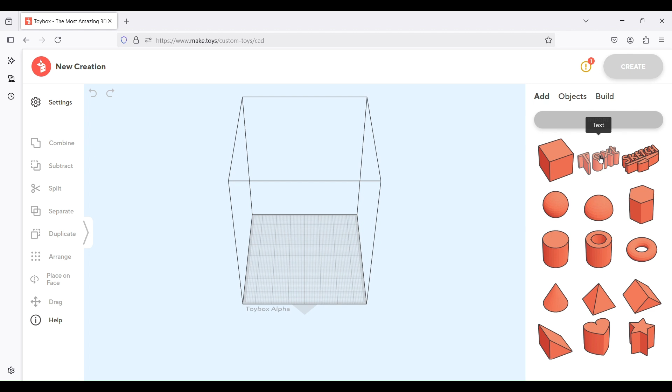So I can do a keychain a bunch of different ways. I could do a square background, I could do circle background, anything I like there. I'm just going to use the text here first, and I'm going to type in my name. I'm Robin, and I'm going to choose Sophia because I think that's a really pretty font. And I'm going to go ahead and just get rid of that.

Now, I do want to tell you, I am using a PC. I am a mouse user, a PC user. I've got a laptop here. If you're trying to do this on a tablet or something like that, then you'll have to figure out the motions on your own. I find that a mouse is really easy to design with.

I've been designing for several years now. I have used Tinkercad quite a bit, I love that. I also love the new creator space here.

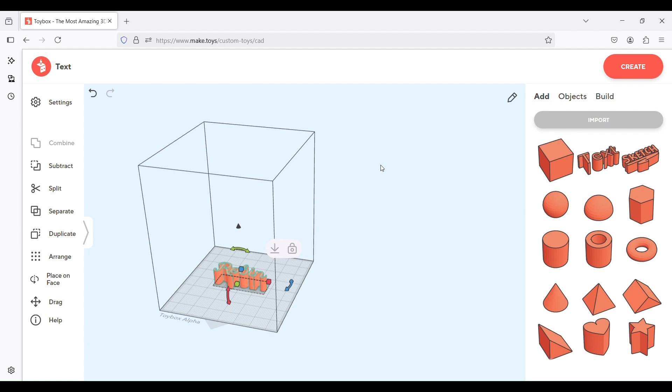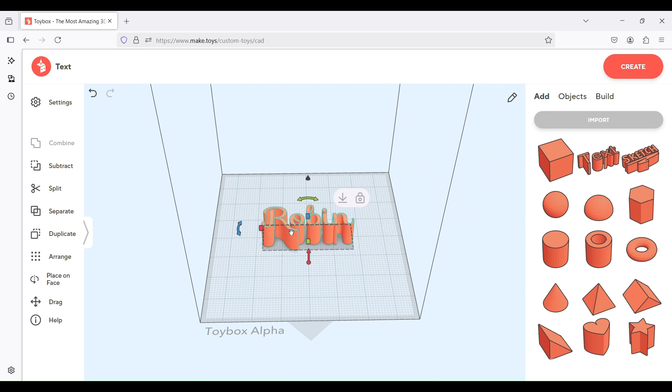So I'm using my left mouse to drag my view. The right mouse drags my view side to side, up and down. So this is my right mouse click, I'm just holding it down and dragging. Left is doing this. And the center, there's a scroll wheel in the center of my mouse, that is going to zoom in and out. So between the three of those things, left mouse, right mouse, scroll wheel, I can get a really good view of what's happening.

Okay, I am going to decide how big I want this. I chose a square. You know what? Let's try a square and see how that goes.

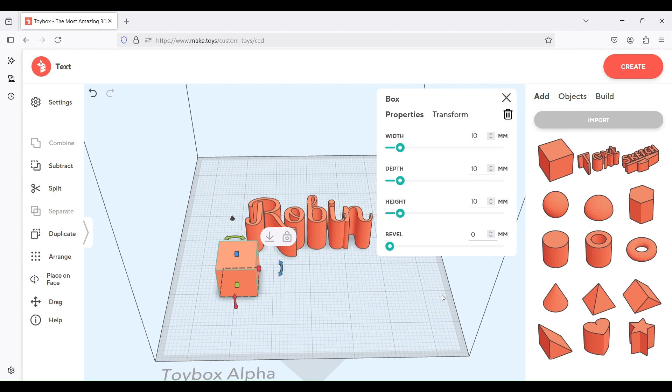Now, this workspace area for the Toybox Alpha, I never design anything more than 72 millimeters. So each one of these is a centimeter, which of course is 10 millimeters. So that's 1, 2, 3, 4, 5, 6. And then there's, you could count however many that is, but let me just tell you, 72 works really great for most toy boxes.

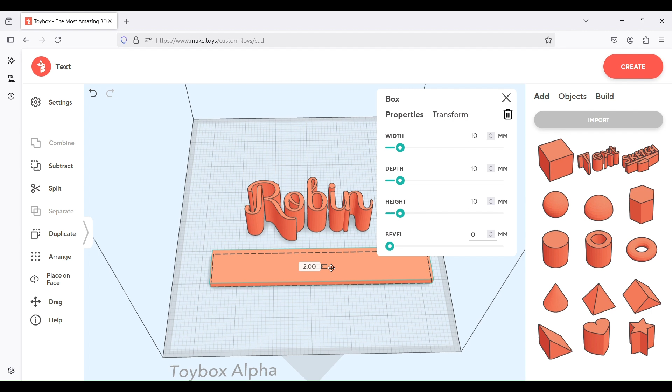So I'm just going to go ahead and bring this out a little ways, I don't know, 50, maybe 60, something like that. See how it shows me? These handles, the little handles on the side, go side to side. This one here is the height. I really only need about 2 millimeters in height on that. And this one is my depth. So, I don't know, 20 millimeters, nice round number. Let's just see how that fits.

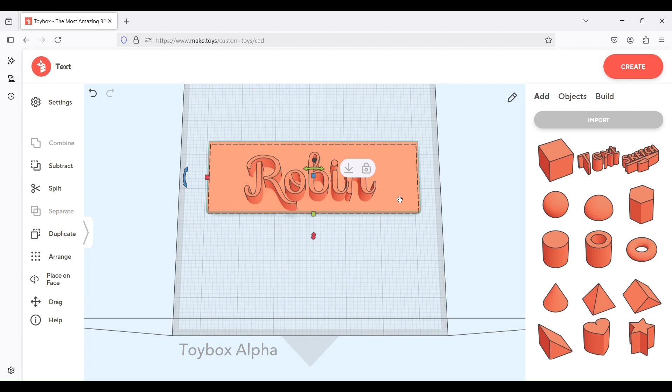If I need to get rid of this, the properties box here to get it out of my way, I could just X on it there. I'm going to go ahead and say that looks about right, maybe how I want it to be.

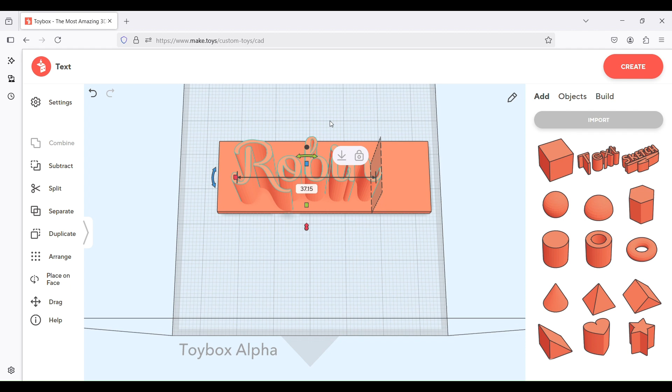So I really want my lettering to be bigger. So a couple ways I can do that. I can actually just do up and down, which is not really what I need at the moment. I could go one direction this way, also not really what I want to do. And by the way, if you're using a keyboard, you can do Control Z to undo anything you want to do. It's also right here, if you hover a little bit, you'll see undo. So anytime you make a mistake, just hit undo and it'll go back as many times as you hit undo.

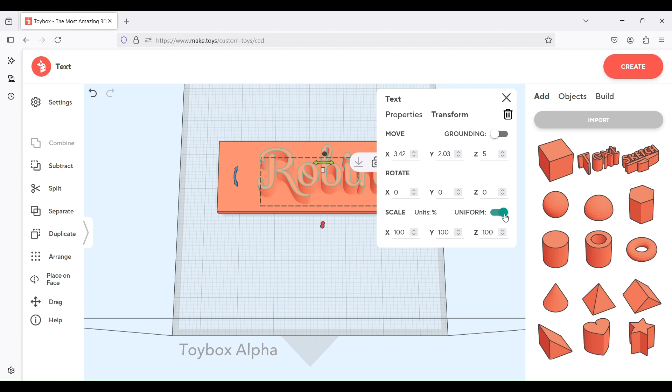I would like to actually, I'm going to edit this and I want to hit transform here. I'm going to do my uniform scale. So when I do that, see how whenever I bring that up and down, it makes it proportional, so it's uniform all over. Alright, so I'm going to do uniform scale and get it on there. That looks pretty good.

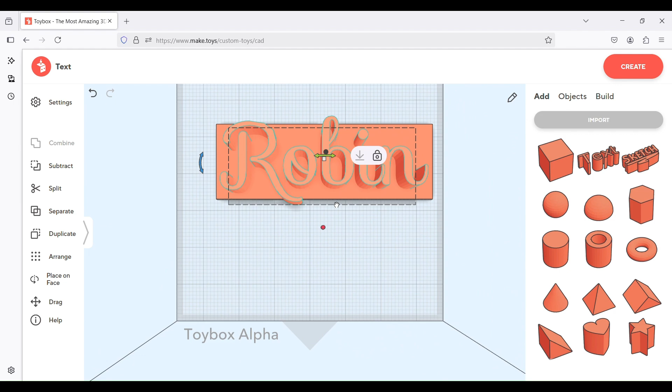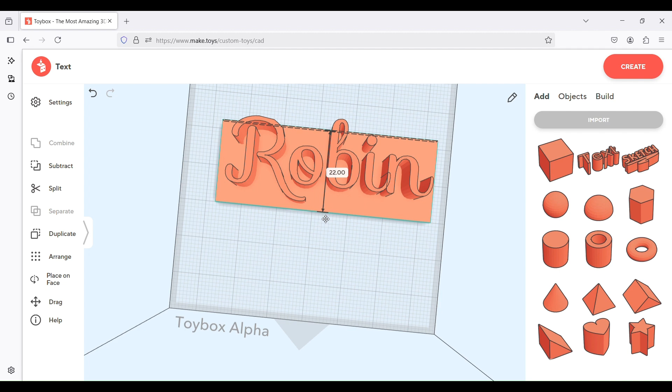I love it whenever the fonts are hanging off a little bit, but you got to be really careful. See how I'm going to have a little problem right here? That probably is going to manage to fall off at some point if I do that. So I can actually make this bigger, I can kind of do whatever I want. I would love it if I felt comfortable leaving it hanging out there, because I think that's really cool looking. I could make it kind of like this, but I just know from experience that would just chop off at some point, so I'm not going to do that.

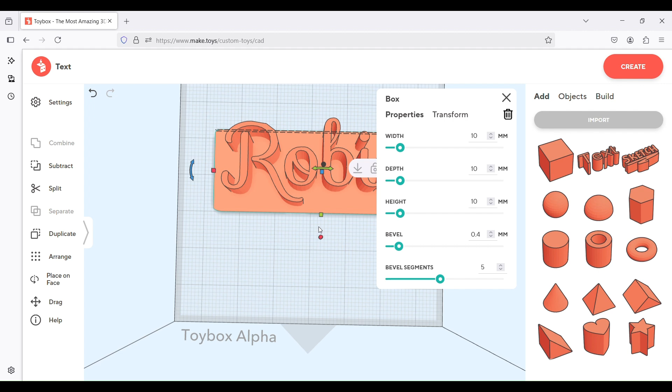I can bevel this, so back up here in my edit screen with my pencil, I can bevel. That means it's going to take the corners. See how the corners are beveling? I could go all the way into an oval if I want to, or I could just do a teeny tiny little bevel on those corners. The bevel segments is how smooth that bevel is. So the more segments you have, the smoother that bevel is going to look. So I could do that, I probably would do that.

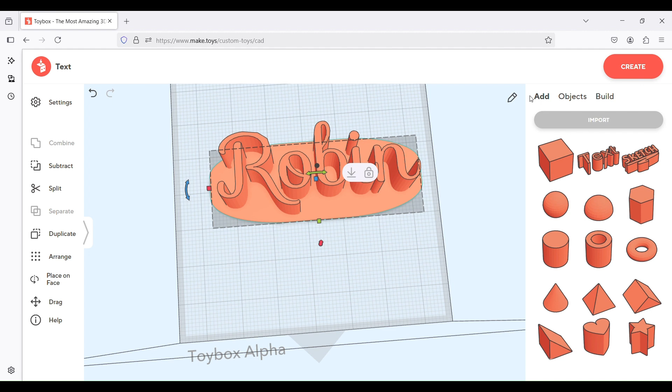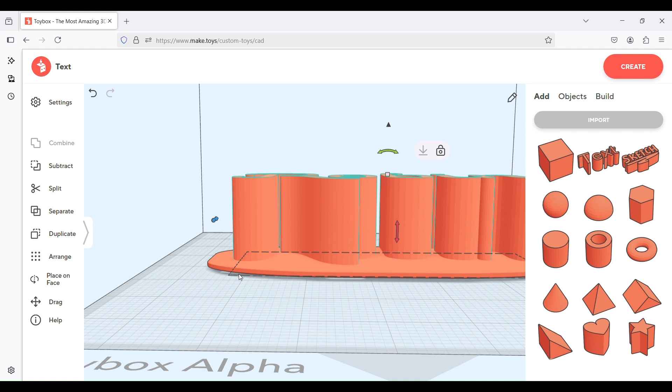Now I will tell you, when you start beveling, let's say I bevel this, and now I try to create this, it's going to tell me I need supports. So let me show you what that means. Underneath, if you look, let me zoom in so you can see better. See underneath how it's hanging up in the air? If you think about how your printer prints, it prints layers. It can't print stuff that's just hanging out in the air like that.

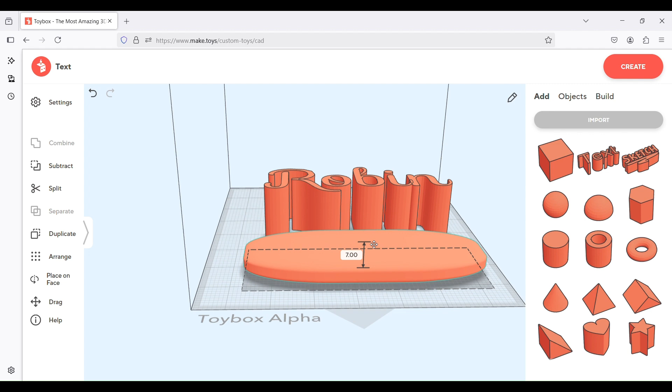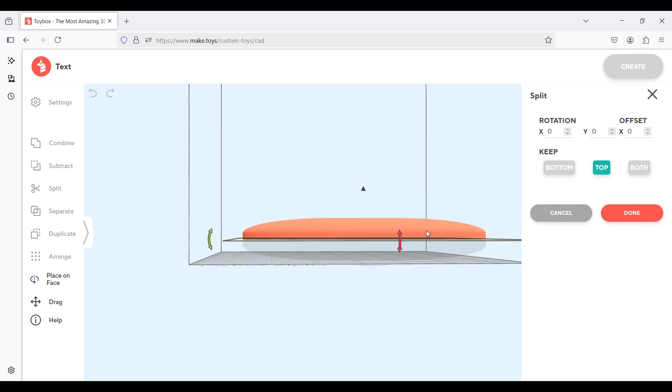It just can't. So there is a way we could, if we really want this shape and we really want it to print, there is a way we could do that. We could make it taller. And we still have some problem under here where certain angles would print fine and certain angles wouldn't, but we can split that. So over here on the left, there's a split, and I can keep the top, see right here, and hit done there. And now that is perfectly flat on the bottom.

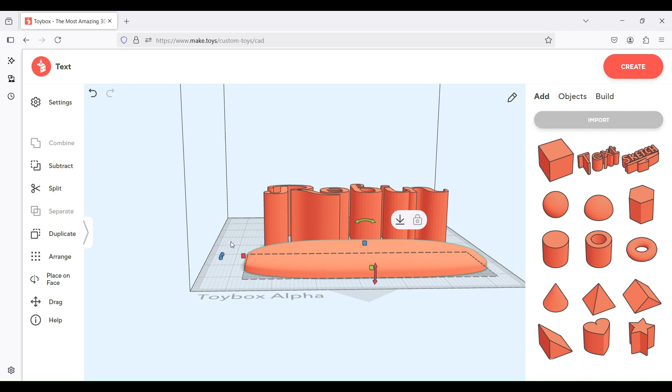Now it's not going to print up here in the air, so if I hit create, it's going to say you can't print that because it's just hanging up in the air. So that's what this button right here, snap to build plate, does - it takes it down to the build plate, which is your surface. So now it's perfectly flat, so that would print just fine. So if I told it to print, it's not going to give me my error messages anymore.

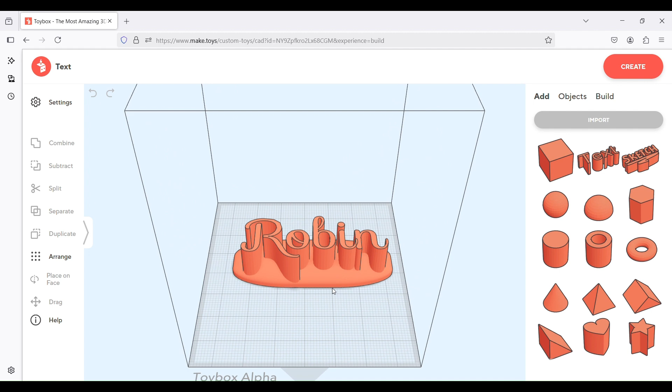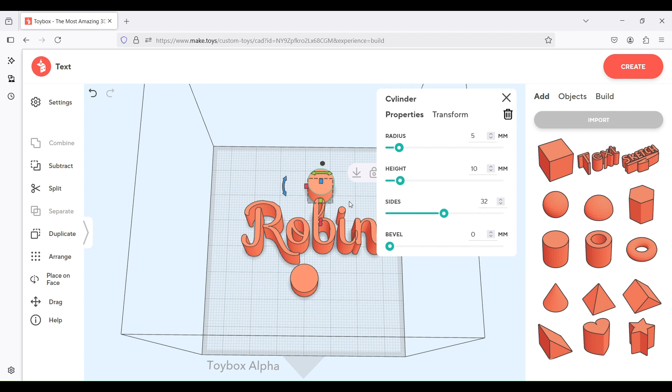Okay, I think that's fine, but I'm going to try also the cylinder here. So to delete a piece, I just hit delete on my keyboard. I don't know what you do on the... oh, that's interesting, when I dragged it brought two of them. That's cool. I don't know what you do with your tablet, so I apologize, I just don't design on a tablet, it's just not my thing.

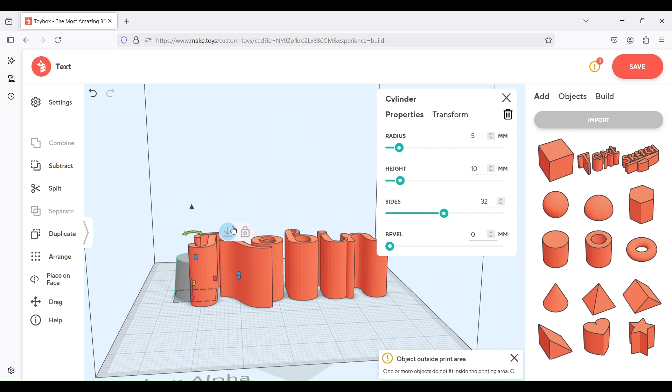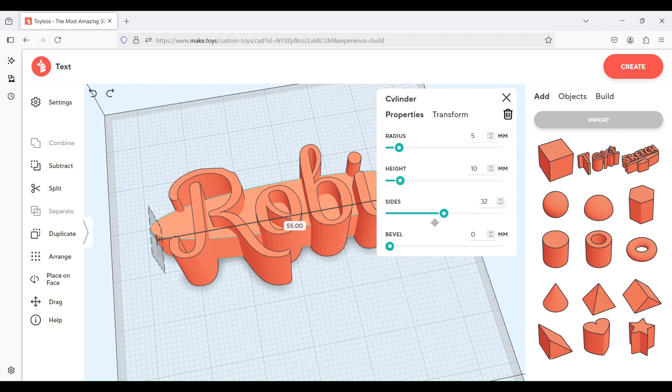All right, I'm going to create, let's see. Whoops, I want that to sit on my work surface. Oh, I accidentally turned it just a little, see how I turned it? I can undo either here or Control Z on my keyboard until it's back to normal. So I accidentally rotated it. I'm going to get rid of that so I can see.

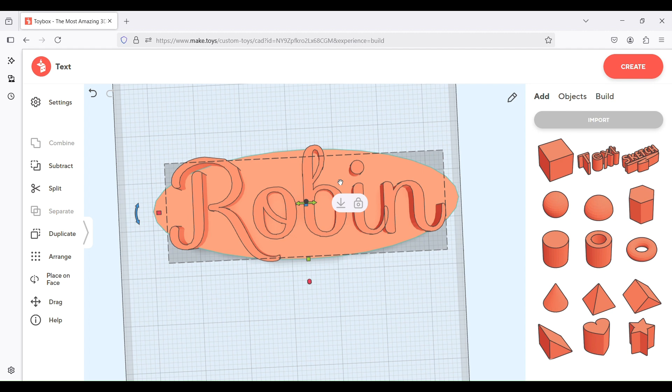I'm going to bring this on out, and I'm going to make it tall. I think this might look really fun. Let's see, I'm going to do this, and I'm going to create it. Oh yeah, I like that. Right here I've got a hole, I'm going to get rid of that hole, so let me move it up just a little.

And by the way, when you get to be more of a power user, there's a lot of, here in your edit, when you go into transform, you can do a lot of interesting things here with grounding and uniform scaling and all that stuff. So don't be afraid to play.

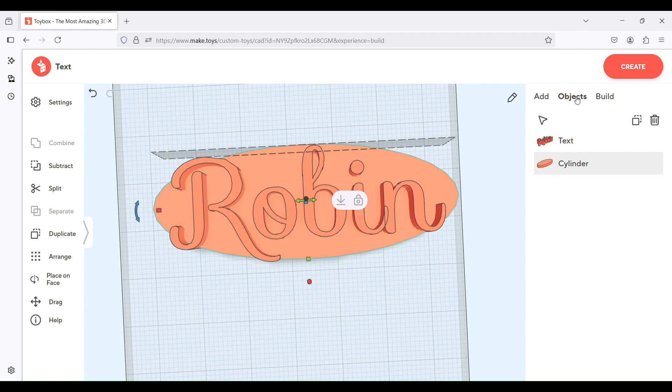You can go in here with your objects and all that, so don't be afraid to play with that. Okay, that looks pretty good, except it's really tall. So I think right about there looks good.

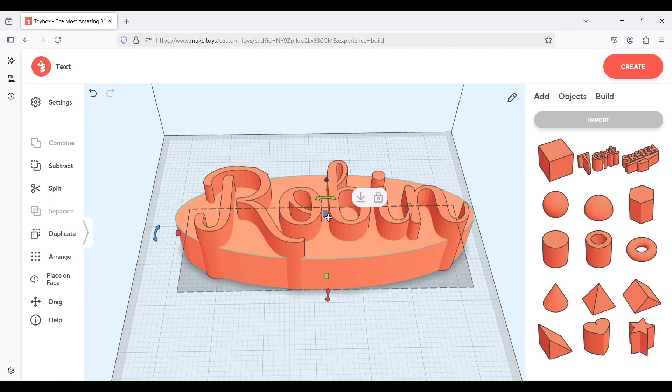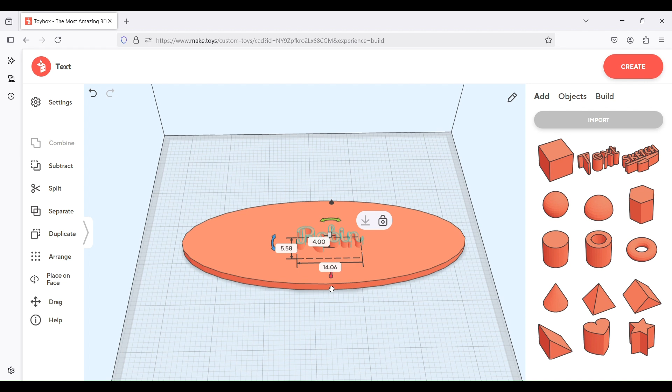I don't need it to be that tall, that's for sure. Having designed for a really long time, that first piece here would be about 2 millimeters. So if I do 2 and then a dot and enter, that brings that down to 2 millimeters high. And if I click on my lettering and say 4 millimeters high, whoops, I accidentally had that all over scaling in place. So I'm going to Control Z, and go into my transform and turn off that uniform scaling because I just want the height. All right, not 2, sorry, 4 millimeters high.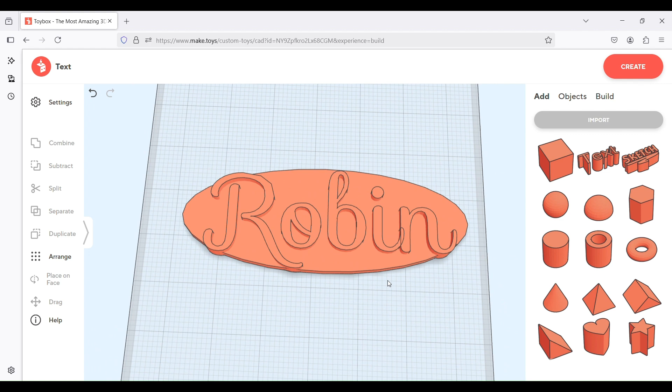These are pretty standard heights that work really well for something like this keychain. I'm going to bring a ring over. The ring happens to be a really good size for a ring as it is for a keychain. I'm going to center that a little more. And I want that to be also 2 millimeters high, just like the background.

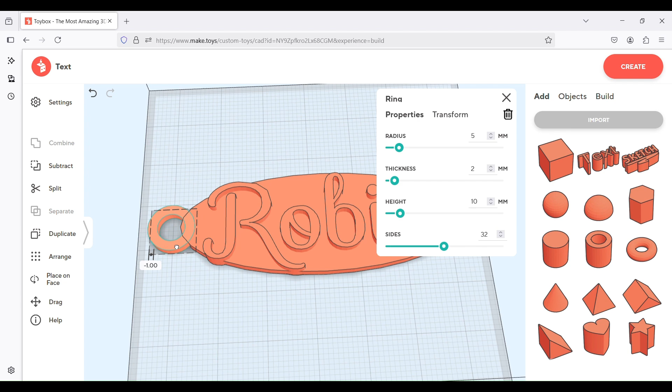I'm going to move him out just a little. I could do that. I think I'm going to leave it right about there.

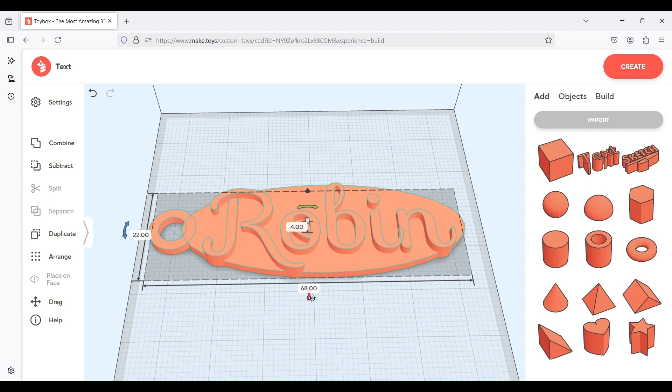Now, if I want to see how big my keychain is all together, I can do Control A, which is all. And whenever I click on my little measurement button there, it tells me that's 68 millimeters. So 68 millimeters is about perfect for what I want.

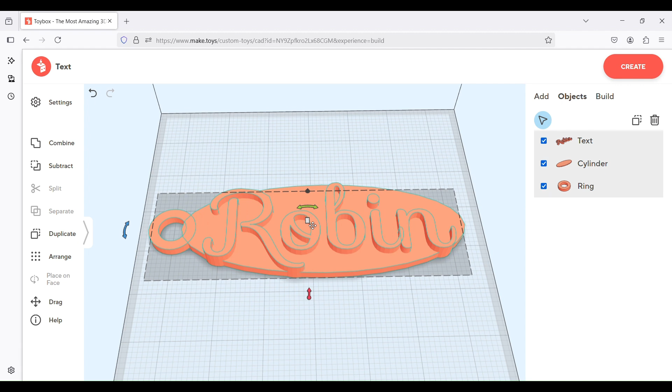If I did want to change it right now, I could go into my objects, and do them all together, and resize, but then I would need to resize each height. I think I'll just stick with 68. That looks good to me. You can see how it would look on the Alpha Toybox. And I think I'm done, so I'm going to hit build.

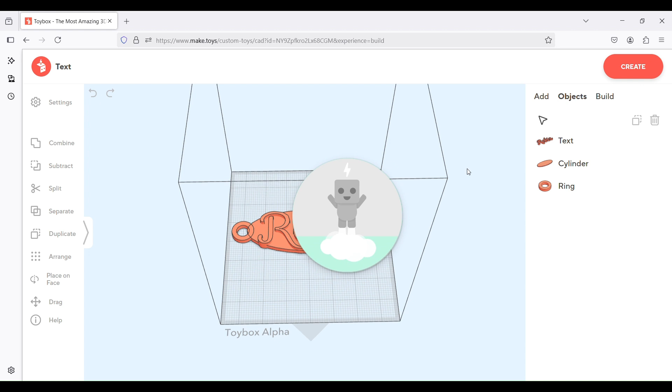And it will tell me how long it's going to take and all that. Now, I didn't choose a different setting, I just let it do the normal setting. So let me go back into edit and show you that. In build, you do have a difference for quality, balanced, or fast. It really depends. I usually just go for balanced because I'm not really big into super great quality, but I usually also kind of check to see how long it's going to take.

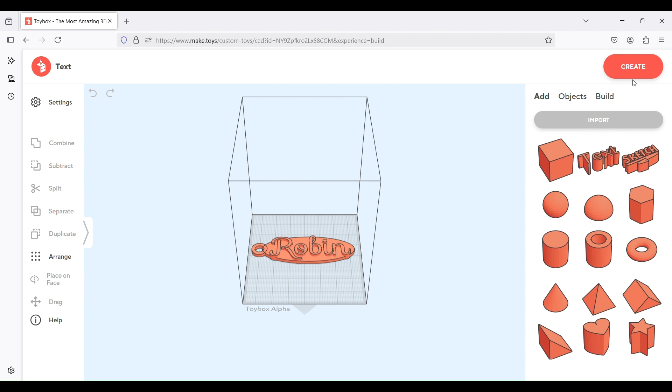So if I go for quality and I build, let's see how long that would take. So that's 18 minutes. And if I go into build and go to fast, I can see how long that would take, and that's only 9 minutes. So you can choose, is this something you're trying to get done on the way to school this morning, or anywhere in between? So I'm just going to choose balanced because for the purposes of today, that's going to be just fine.

And I'm going to hit create again. And if I want to save this so that I can print it again and again, the easiest way is to hit share. This actually will show up in my creations for a while, but if I want it to show up forever, then I'm going to click on that and it copies my link. And then I go into my notepad and I paste that link. Notepad is something you can find just by searching notepad, and that's an app that's in your computer. That's an easy way to always be able to find that link, but you can also do it when it'll show up in your toys as well.

All right, I'm going to print this in 2 colors, so I will come back and show you what happened.

So here's the finished product. I think it turned out pretty great. I printed it in 2 colors on my Comet. As soon as it started printing the wording, I hit pause and then removed the filament and then inserted the new filament back in and finished it out. It's a little harder to get that perfectly on the Alpha model because you have to kind of guess when that's happening. It's hard to see in there and see what's going on, but it can be done.